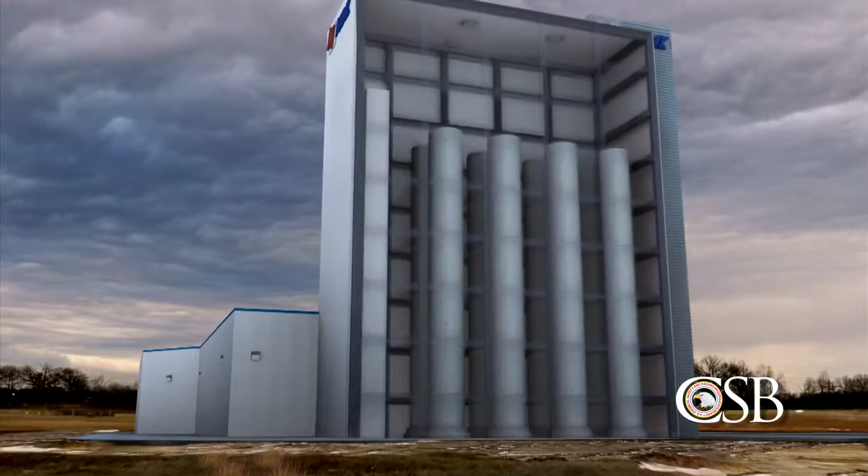NDK Crystal operated a synthetic quartz crystal manufacturing facility in an industrial area adjacent to Interstate 90 in Belvidere, Illinois. NDK produces large crystals used for a variety of products, particularly electronic devices. The facility housed 8 massive cylindrical pressure vessels with 8-inch thick steel walls standing 50 feet tall.

Inside the vessels, raw mined quartz, or silica, was mixed with a corrosive sodium hydroxide solution at extremely high pressures and temperatures. The vessels were kept sealed for up to 150 days to allow the growth of large single crystals of quartz. The silica and sodium hydroxide react with iron in the walls of the steel vessel, forming a layer of sodium iron silicate, or acmite. The company believed this acmite coating would protect the vessels from the corrosive effects of the chemicals inside.

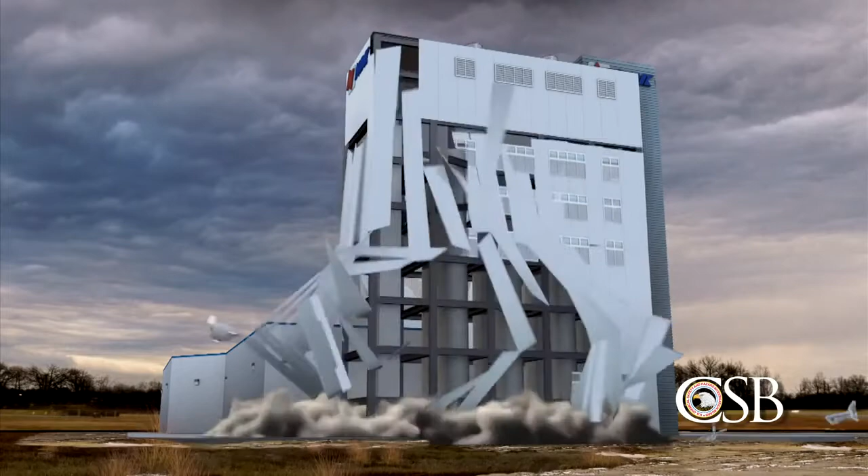Over the years, NDK was warned that corrosion might be compromising the walls of the pressure vessels. Yet the company continued to operate these vessels without performing recommended inspections. On December 7, 2009, pressure vessel number 2 was 120 days into a routine 150-day crystal growing cycle, when suddenly, at about 2:30 p.m., it violently ruptured.

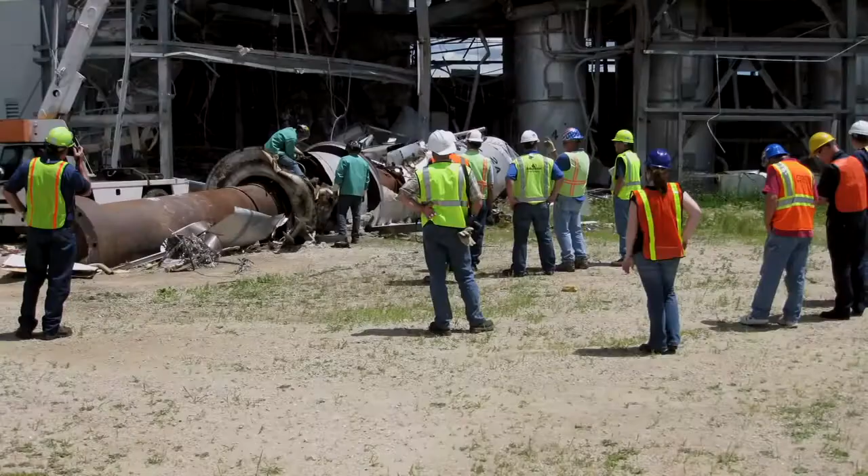Large pieces of structural steel were thrown from the building. One piece was blown 650 feet toward a gas station on the Illinois Tollway. Tragically, the building fragment struck and killed a driver who was walking back to his truck. A large piece of the pressure vessel tore through an exterior wall of the NDK facility, skipped across a neighboring parking lot, and struck the wall of an adjacent automotive supply company where nearly 70 people were working. One was injured.

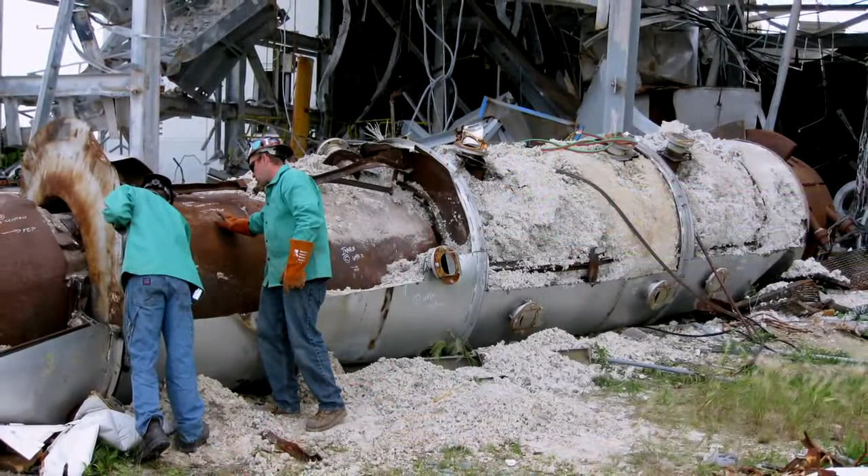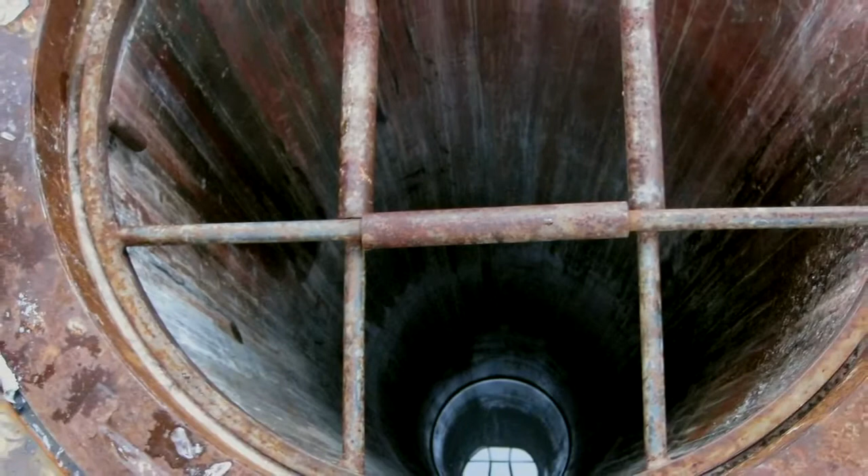To determine the cause of the failure, the CSB reviewed process data from vessel number 2 and worked with the National Institute of Standards and Technology, or NIST, to examine results from metallurgical testing. The investigation concluded that the failure most likely resulted from stress corrosion cracking on the inside walls of the vessel, which had gone uninspected and undetected for years. In fact, the CSB learned that NDK never actually tested or verified the effectiveness of the acmite coating to prevent the corrosion in the vessels.

In addition, the CSB found the design of the NDK vessels made them inherently susceptible to stress corrosion cracking. A combination of vessel materials, caustic sodium hydroxide solution, and high temperatures and pressures created a corrosive environment inside the vessels. Also, the vessels did not meet requirements of the widely recognized ASME boiler and pressure vessel code. The thickness of the vessel walls exceeded recommended limits to ensure safe manufacturing, and 3 of the vessels did not meet the code's requirements for toughness.

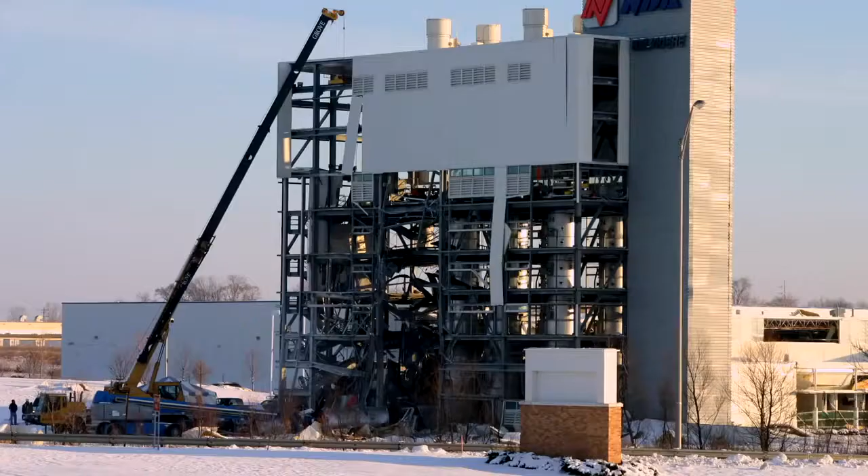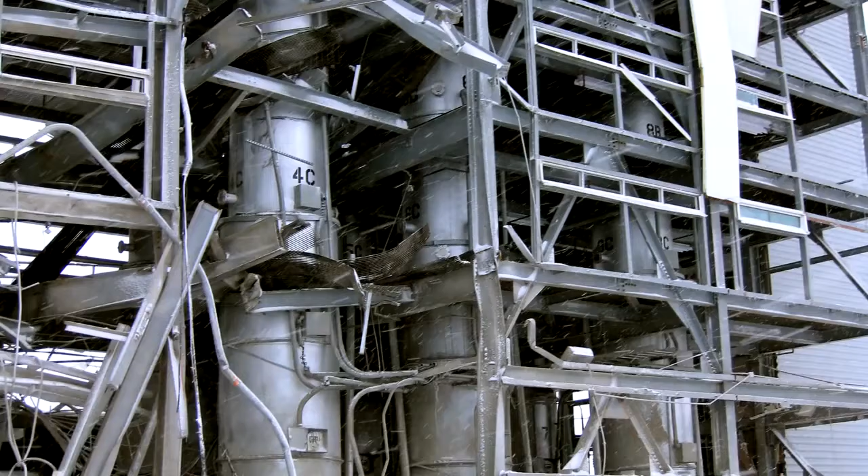In 2002, NDK had petitioned Illinois state regulators for a special exemption to use the 3 vessels, and this was granted. The vessel designer, Engineering Pressure Systems, recommended that the inside of the vessels be inspected annually, but the CSB found that neither NDK nor the state of Illinois ever performed regular internal inspections of any of the 8 vessels.

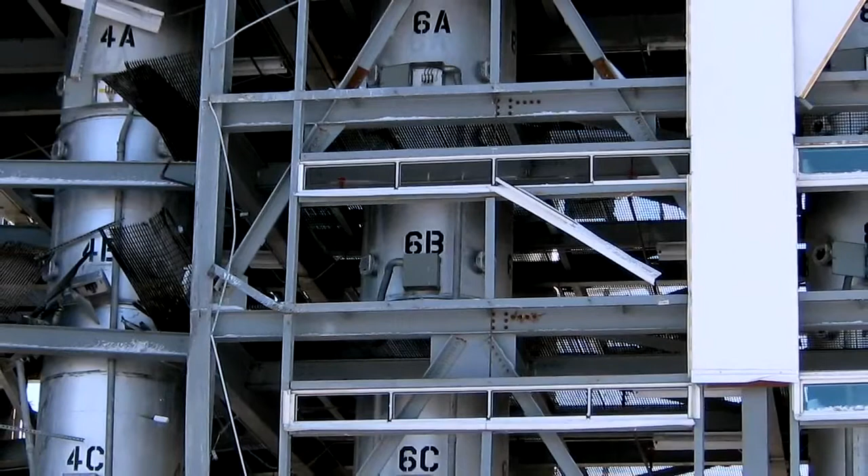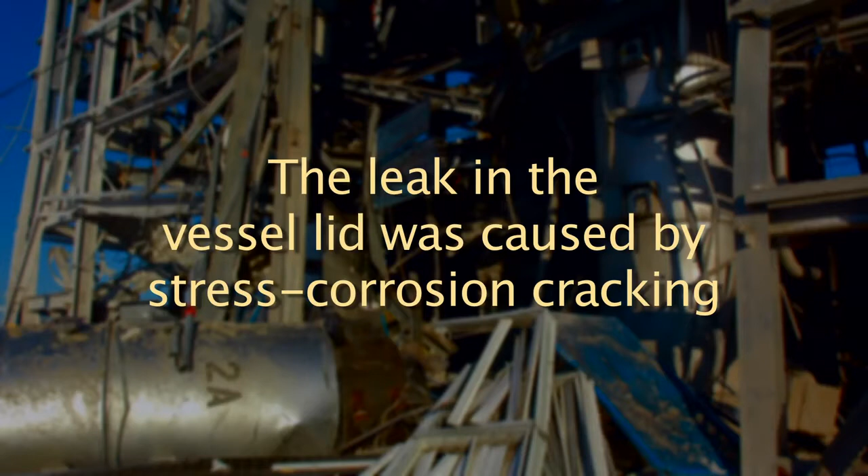In January 2007, pressure vessel number 6 experienced an uncontrolled leak of hot caustic material through its lid. The leak sprayed onto the ceiling and 5th floor of the NDK facility, but caused no injuries. NDK initiated an investigation into the accident. A third-party consultant, hired by NDK's insurance company, determined that the leak in the vessel lid was caused by stress corrosion cracking and concluded that the vessel's improper design, fabrication, and material selection were the cause.

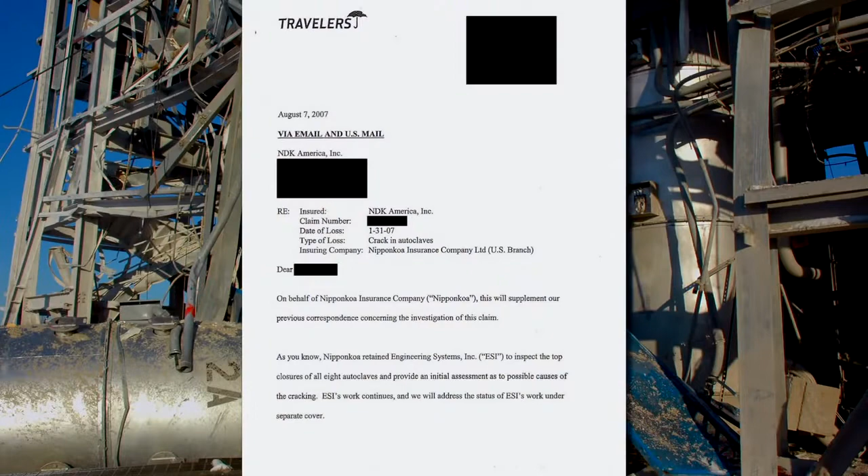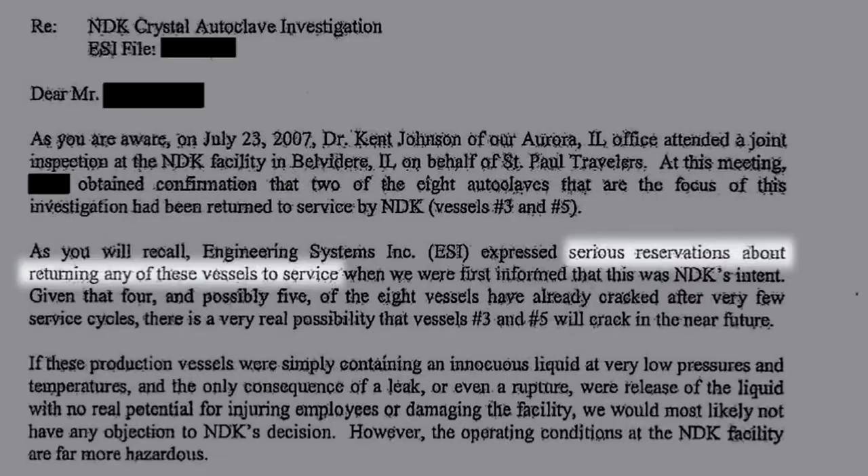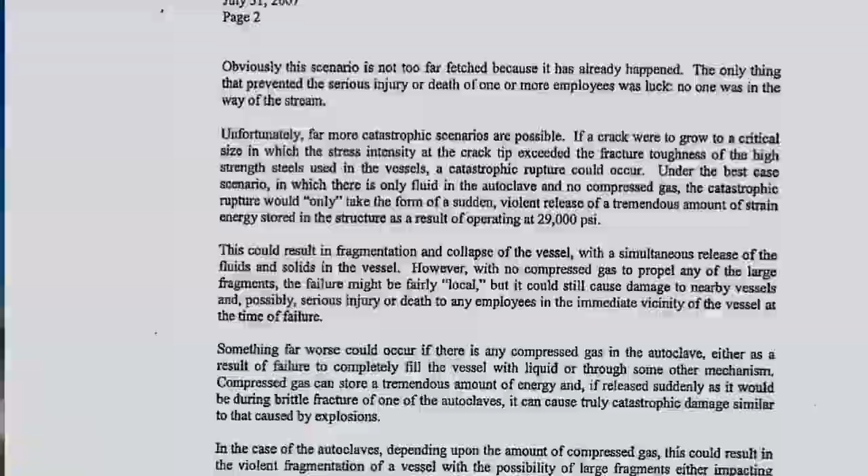Later, in August of 2007, the insurance company informed NDK in a letter that its consultant had serious reservations about returning the pressure vessels to service, and that a decision to do so would be seriously flawed. The insurance consultant specifically cautioned NDK that far more catastrophic scenarios are possible, putting NDK employees and the public at risk, specifically naming the Illinois Tollway Oasis gas station, where the truck driver would be killed by flying debris 2.5 years later.

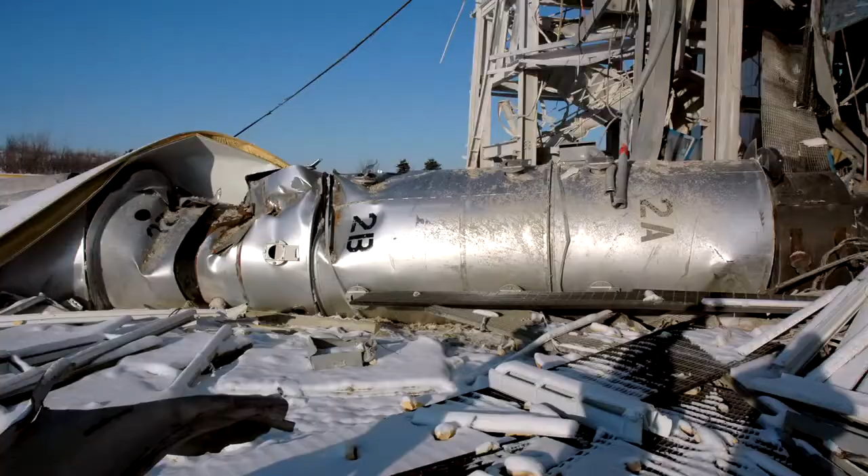Despite this strong warning, NDK continued to operate the vessels without establishing an internal inspection program or verifying whether the acmite coating was in fact protecting the vessels from corrosion. And over the years, the state of Illinois only performed inspections of accessible external surfaces and pressure relief devices of the vessels, never examining the vessels for corrosion inside. The state had approved the vessels for non-corrosive use, without thoroughly examining whether the crystal growing process would corrode the metal walls. Overall, the CSB found that no certified inspector had ever performed internal inspections of vessel number 2 during the 6 years it was in service.

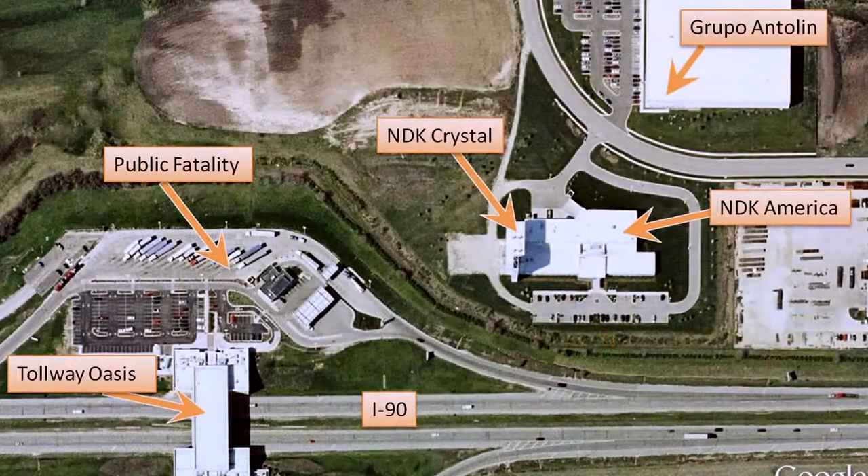The CSB also found, despite the inherent hazards of the large-scale, high-pressure process at NDK, it was unsafely sited in a light industrial area near other businesses, the interstate, and the rest area. The city of Belvidere has no additional siting or zoning requirements for heavy industrial facilities or requirements for considering the off-site impact of industrial accidents.

In its report, the board recommended stricter requirements for the design of heavy-walled pressure vessels to reduce the susceptibility to corrosion or damage in high-pressure operations. The board also recommended that NDK use an inherently safer process for growing synthetic crystals, preferably using lower pressures and temperatures. The board said such a process is already used by another company in Ohio.

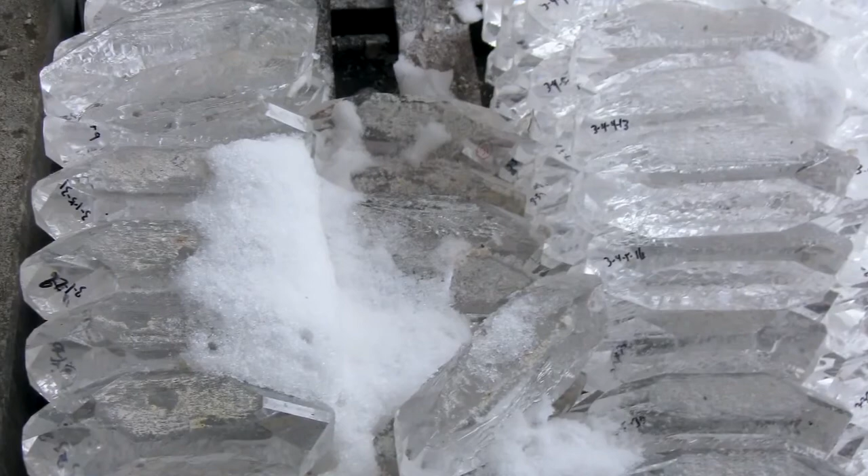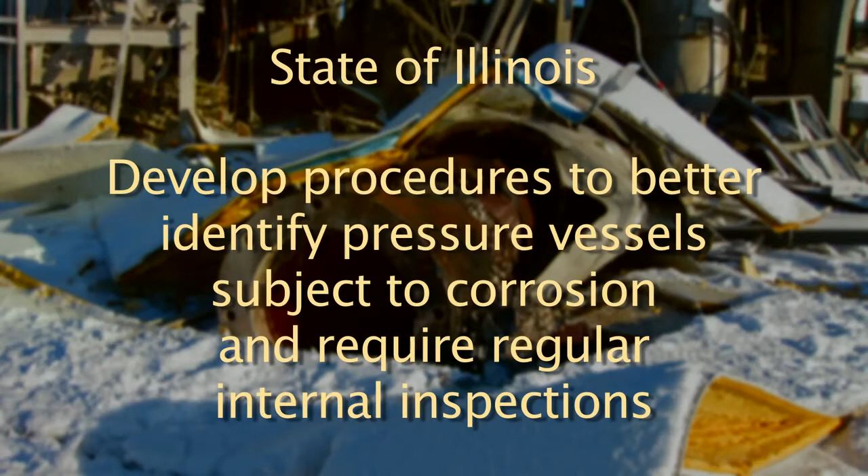The CSB urged that Illinois regulators develop procedures to better identify pressure vessels subject to corrosion and require regular internal inspections. And the board recommended that NDK conduct an independent facility siting study prior to restarting operations to address off-site consequences. The CSB concluded that with stricter regulations for the design and construction of high-pressure vessels and regular inspections for corrosion, catastrophic accidents like the one at NDK can be prevented.